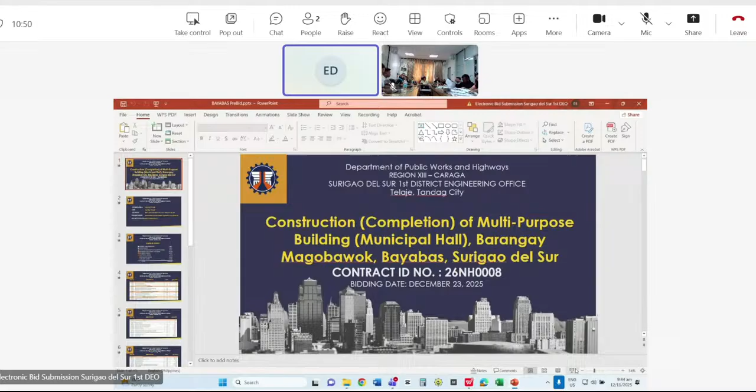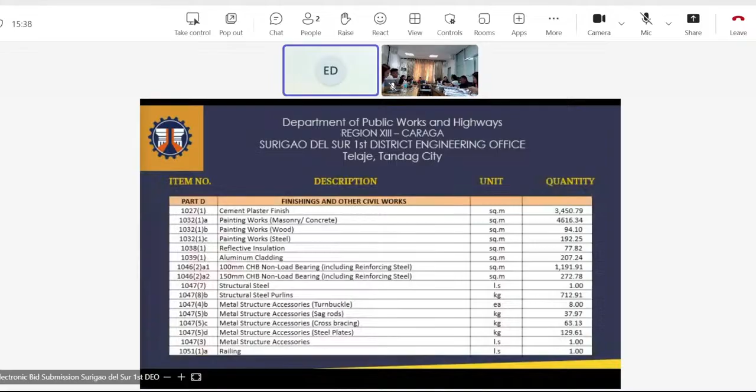Continuation for Part D, finishings and other civil works. The item number, description, unit, and quantity are being shown.

For Part E, plumbing works, and Part F, electrical works, the item number, description, unit, and quantity are being shown. And for Part G, mechanical works, Part H, auxiliary works, the item number, description, unit, and quantity are being shown.

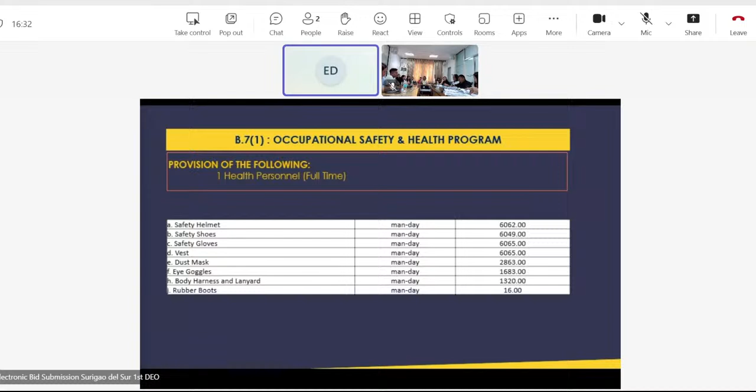For the project billboard, we have 1 unit 4x8 DPWH tarpaulin and 1 unit 8x8 POA tarpaulin. For the occupational safety and health program, we have 1 health personnel full-time, and the equipment description, unit, and quantity are being shown. The minimum equipment requirement: 1 plate compactor, 1 concrete vibrator, 1 bagger mixer, 1 dump truck, and 1 jackhammer.

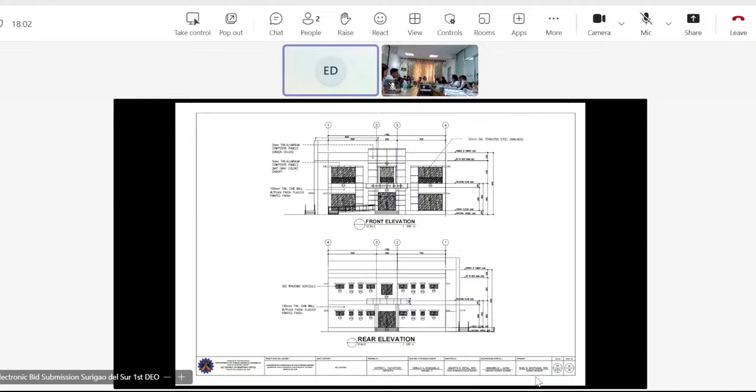For the architectural plans, we have the perspective, location plan, vicinity map, and location. The ground floor plan, second floor plan, and roof deck floor plan. The front elevation and rear elevation. The left side elevation and right side elevation. The cross section to AA and longitudinal section to BB. The schedule of doors and windows.

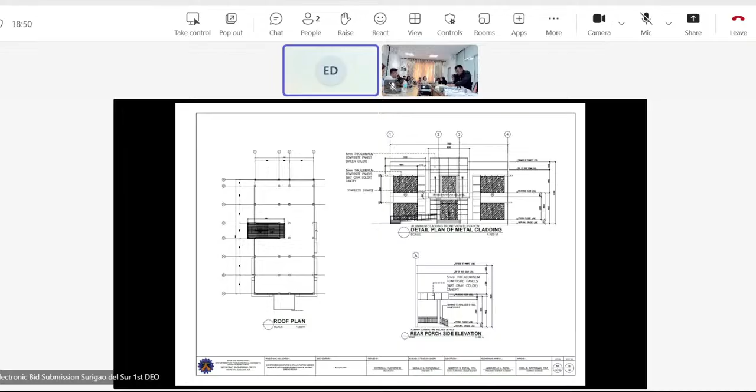A reflected ceiling plan for ground floor and second floor, and also the roof deck. The roof plan and detailed plan of metal cladding. Detailed plan of metal cladding. Full cladding details. The plan for the ramp.

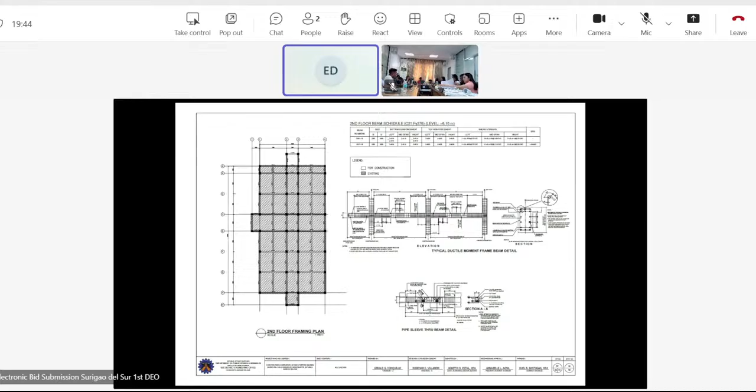And for the structural plans, we have the foundation plan, the footing schedule, the slab details, and tie beam details. The second floor framing plan and floor beam schedules. Stair details. Roof deck beam schedule and roof deck framing plan, roof deck slab plan, and steel deck specifications.

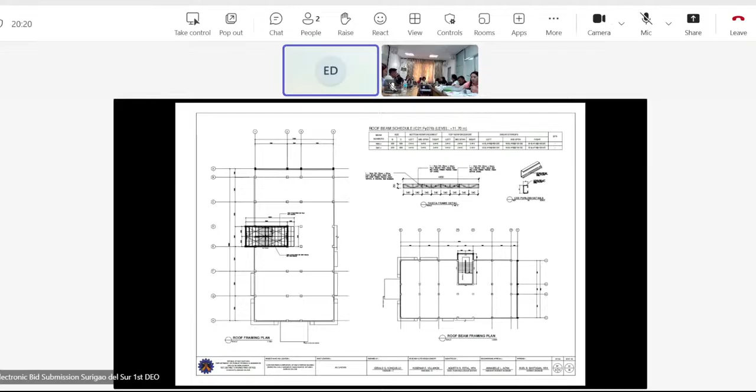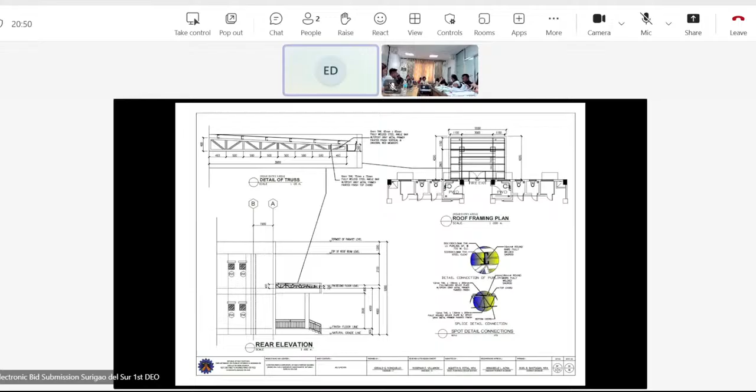The roof framing plan, and roof beam framing plan, and the fascia frame detail. Half truss detail, ridge girt detail, steel girt detail. The roof framing plan, detail of truss and rear elevation details for the truss. Detail of truss and roof framing plan. Stair railing details.

And for the plumbing plans, we have the water line layout plan for the ground floor, second floor, and roof deck. Storm drain line layout plan for ground floor, second floor, and roof deck. The sanitary line layout plan for ground floor and second floor.

The isometric diagram for water line layout plan. Isometric for storm drain line layout. Isometric for sanitary line layout. Septic tank details, catch basin details, clean out and service tap connection details. Details for elevated tank. Cistern tank details.

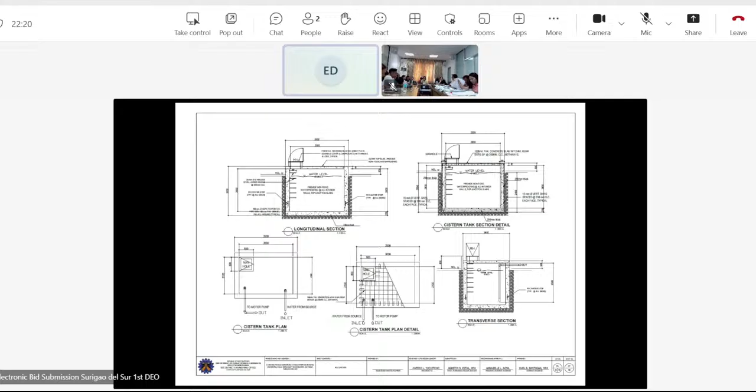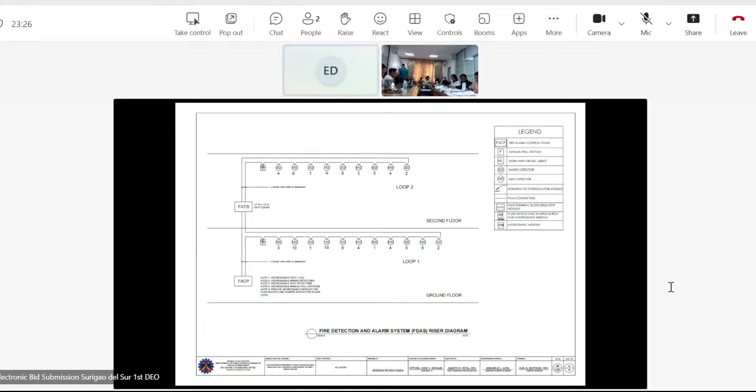Next, for the mechanical plans, we have the FDAS layout plan for ground floor and second floor. The FDAS riser diagrams. And for the dry standpipe for fire sprinkler system layout plan for ground floor and second floor. The isometric diagram for fire sprinkler system layout plan. Detail of fire department connection.

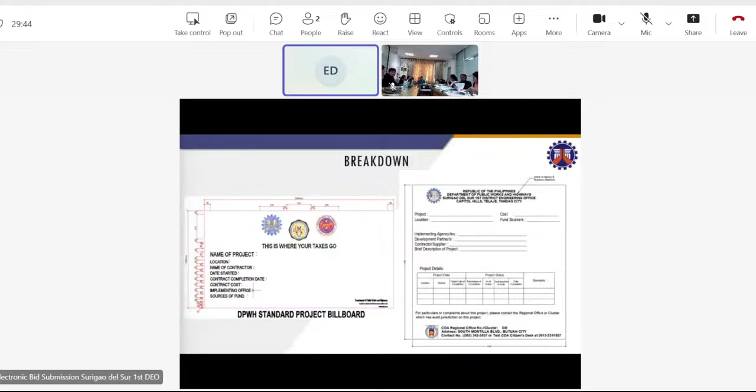Breakdown for project billboard. Breakdown for B.7, occupational safety and health: we have 1 safety practitioner and 1 health personnel. For B.8, traffic management, the materials, unit, and quantity are as shown.

For Part C earthworks, the item number, description, unit, and quantity are as shown.

Part D, sub-base and base course, we have item 200, and Part E surface course, we have item 311. For Civil Works 2, construction of drainage structure along road, Part F drainage and slope protection structure, the item number, unit, description, and quantity are as shown.

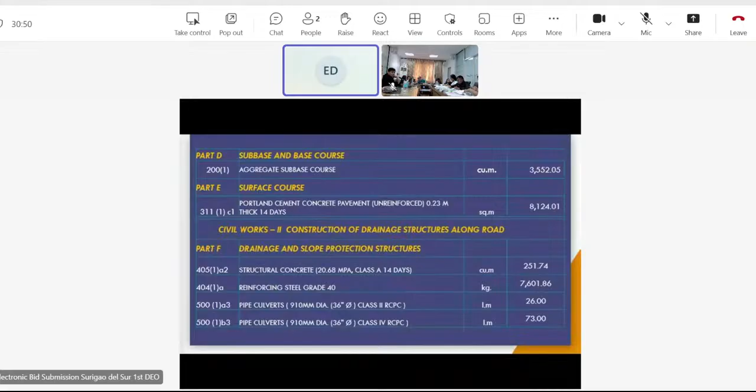For minimum equipment requirement, we have 4 units dump truck, 1 unit water truck, 1 unit transit mixer, 1 unit backhoe, 1 unit motorized road grader, 1 unit vibratory roller, and 1 joint sealer equipment machine.

For sand and gravel at Caras-an River Quarry, average hauling distance 91.02 kilometers from project site. For item 200 and boulders at San Isidro River Quarry, average hauling distance 8.93 kilometers from project site.

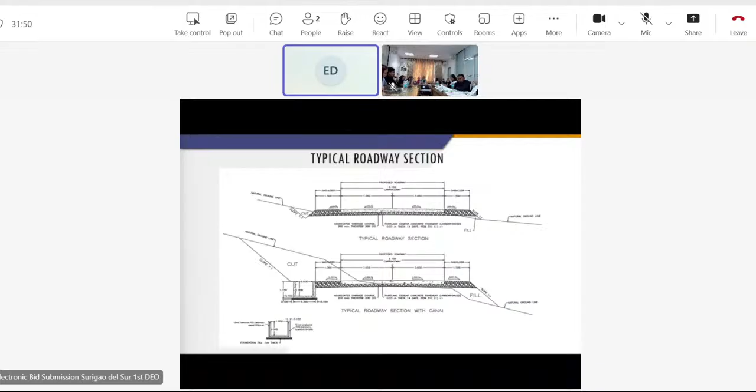That's all, thank you. Okay, thank you Engineer. Any comment from our procurement?

From our pre-pro, we have add 1 unit billboard for installation in the middle part of the project. Removal of trees, item number correction must be 1011. Verify the reason of removal of RCPC. Reflect on plan the existing RCPC in dotted or broken line to validate the removal and replacement. Then verify survey team if existing RCPC can still be reused and reinstalled. Indicate on plan the number of defective RCPC, possibly not all. That's it.

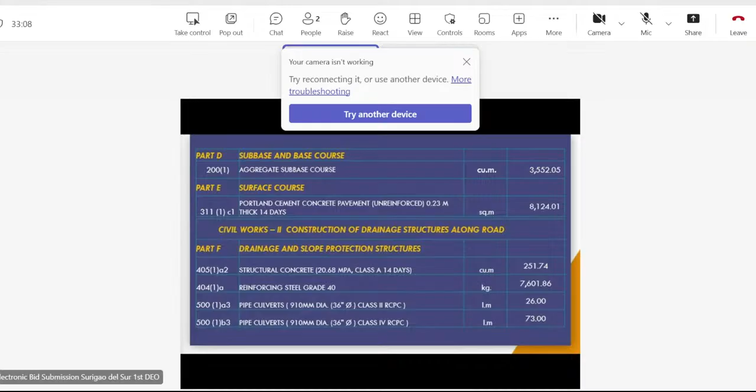Okay, any comment from the DPWH? Billboard. So, since there is none, we'll proceed to the next project, which will be represented by Engineer Sahay.

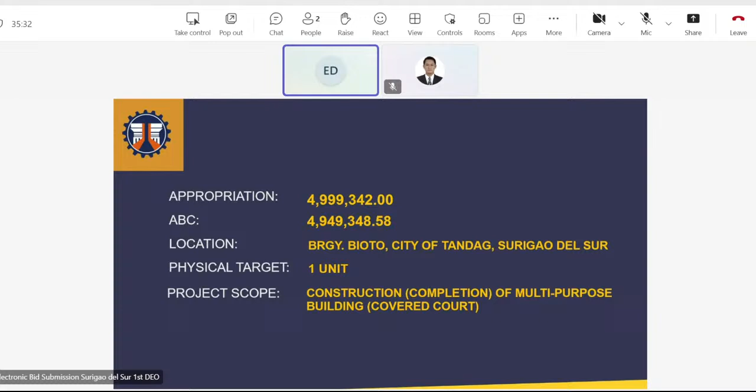Location at Barangay Bioto, City of Tandag, Surigao del Sur. Physical target of 1 unit. Then project scope, construction completion of multi-purpose building covered court, for project duration of 123 calendar days.

Scope of work: general requirements 3.11%, earthworks 1.95%, plain and reinforced concrete work 18.04%, finishing and other civil works 63.21%, electrical works 3.18%, plumbing works 4.91%, and mechanical works 5.60%, with a total of 100%.

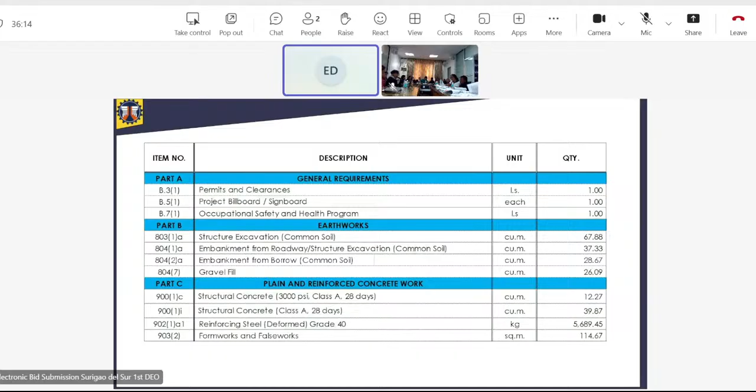For the item number, description, unit, and quantity are shown. Part D, finishing and other civil works, quantity, unit, description are shown. Part B, continuation of Part D. Then Part E, electrical works, Part F, plumbing works, and Part G, mechanical works, item number, description, unit, and quantity are shown.

For minimum equipment requirement, we have the dump truck with a capacity of 12 cubic meters. B.51 project billboard: 1 unit of 4x8 DPWH tarpaulin and 1 unit of 8x8 COA tarpaulin. And for B.71, occupational safety and health program, provision of the following: 1 health personnel and 1 safety practitioner. The names and specification, unit, and quantity are shown.

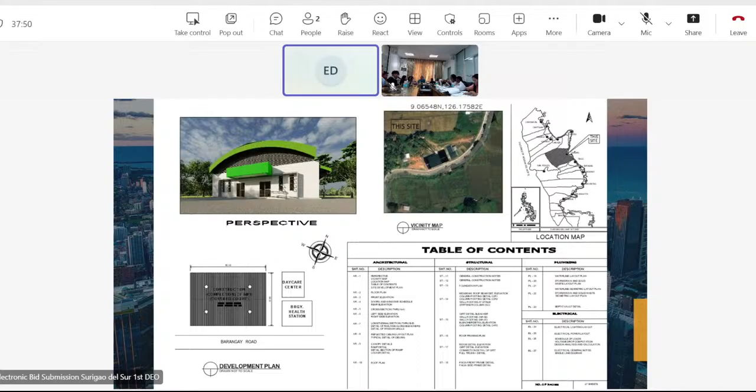Plans: architectural plan, the perspective, vicinity map, development, and location of the floor plan, front elevation, doors and window schedule, and rear elevation, cross section through AA, and left side elevation, and right side elevation, longitudinal section through BB, detail of railings along bleacher, and detail of window grills.

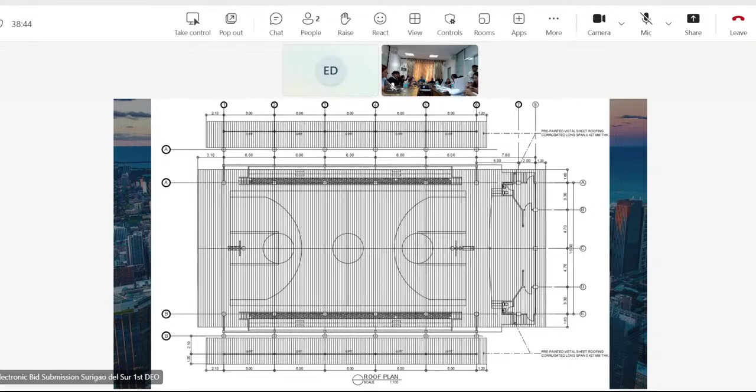Reflected ceiling layout plan, and typical detail of ceiling, canopy detail, louver detail, ramp detail, and detail section of ramp, roof plan, and for structural plan, structural foundation plan, column detail C2F1, column footing detail C3F2, and wall footing detail at stage, mid beam roof beam detail elevation, and...

Stiffener column, wall footing detail WF2, and wall footing detail WF1, girt detail at bleacher, column footing detail C4F2, bleacher detail section, and roof framing plan, ridge detail elevation, girt detail elevation, full truss one detail, and connection detail of girt, fascia front frame detail, fascia side frame detail.

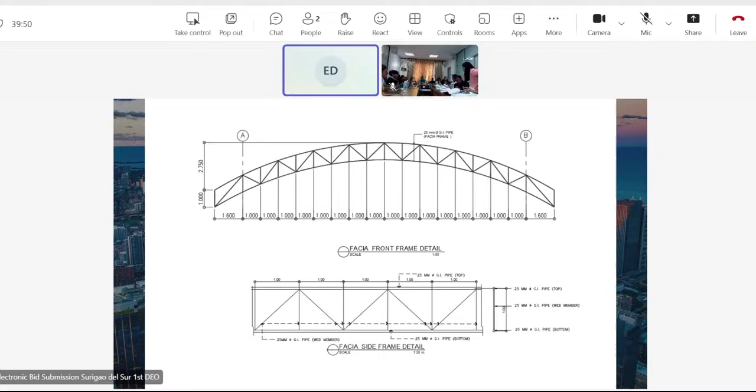For plumbing plan, you have the water line layout plan, storm drain and solid waste layout plan, water line isometric layout plan, storm drain and solid waste isometric layout plan, and septic vault detail section through AA and detail section through BB. Electrical plan: electrical lighting layout plan, and electrical power layout plan.

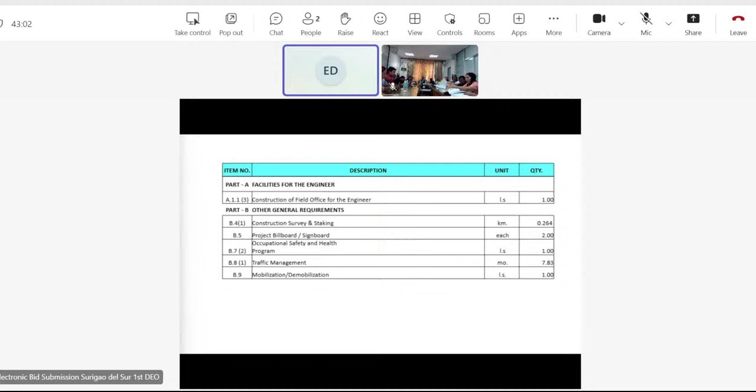For Part A, facilities for the engineer, Part B, other general requirements, the item number, description, unit, and quantity are being shown. For Part C, earthworks, and Part D, subbase and base course, the item number, description, unit, and quantity are being shown.

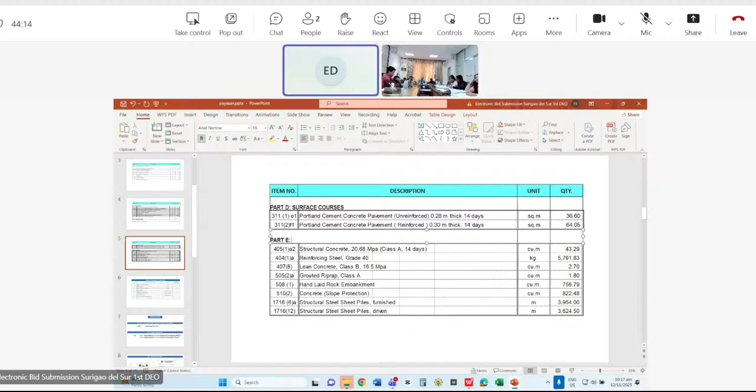So for Part E, surface courses, and Part F, drainage and slope protection works, the item number, description, unit, and quantity are being shown.

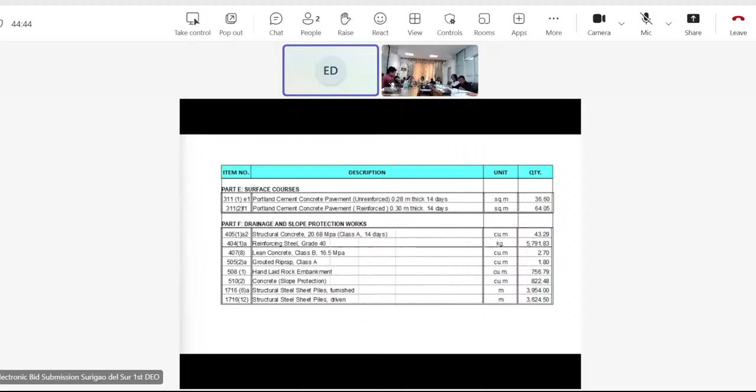For the minimum equipment requirement, we have dump truck 1, vibro hammer 1, water truck 1, transit mixer 1, backhoe 1, motorized road grader 1, vibratory roller 1, and joint sealer machine or equipment 1, a total of 8 equipments.

For the breakdown, construction of field office for the engineer, we have 1 unit bunkhouse 7x7. Then project billboard, we have 2 each composed of 1 unit for DPWH and 1 unit for COA. Here is the project billboard.

For the occupational safety and health program, we have 1 first aider and 1 safety practitioner, both full-time. Then the materials for the safety and health program, the unit and quantity are as shown.

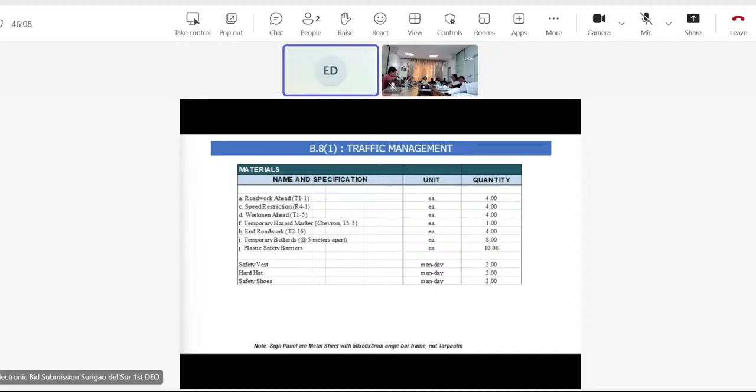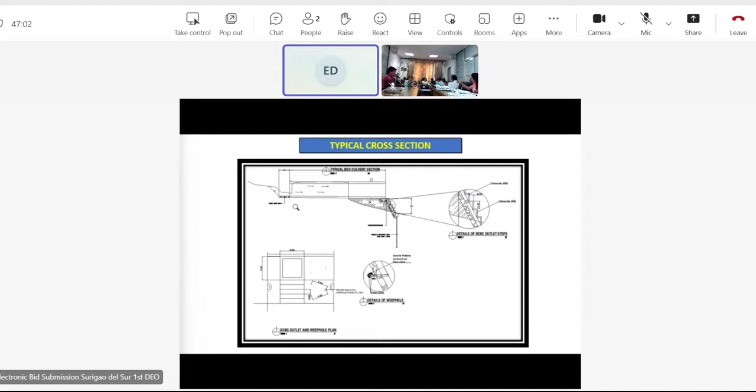We also have the typical cross section for the box culvert and outlet RCBC outlet steps details.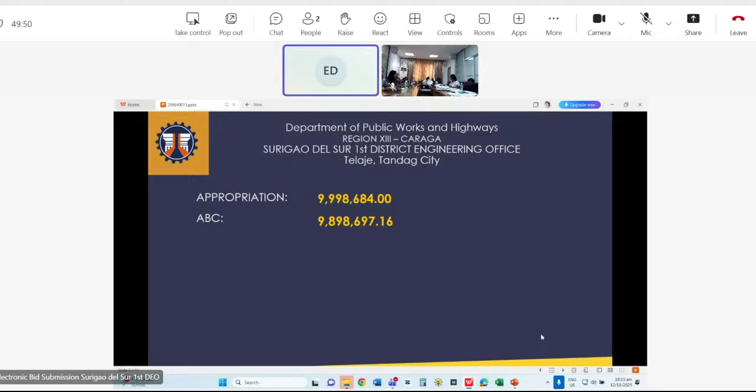Appropriation 9,998,684 pesos. ABC, we have 9,898,697.16 pesos. Location, Barangay Cabugo, Bayabas, Surigao del Sur.

Number of buildings, 1 unit. Project scope, completion of multipurpose building covered court. Project duration, 193 calendar days.

For scope of work, first, general requirements, we have 1.18%, earthworks 3.60%, plain and reinforced concrete work 21.86%, finishings and other civil works 65.07%, plumbing works 2.84%, electrical works 3.48%, and mechanical works 1.97%, with a total of 100%.

Item number, description, units, and quantities for Part A, Part B, and Part C are shown.

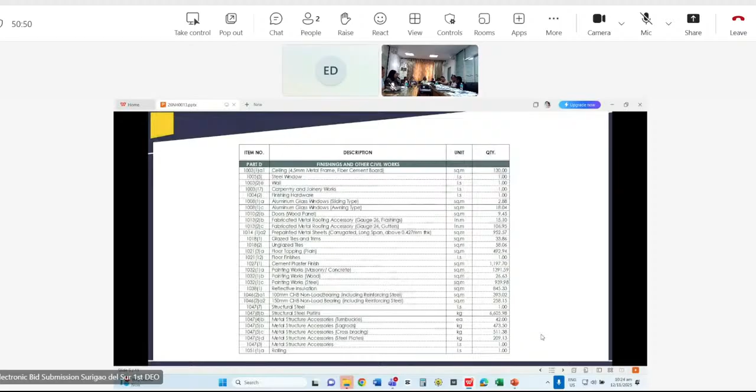Item number, description, units, and quantities for Part D are shown.

Item number, description, units, and quantities for Part E, Part F, and Part G are shown.

For the minimum equipment requirements, we have 1 plate compactor, 1 concrete vibrator, 1 bagger mixer, 1 dump truck, and 1 jackhammer.

For the permits and clearances, we have BFP, zoning, master plumber, and PEE.

For the project billboard, we have 1 unit 4x8 DPWH tarpaulin backed with marine plywood and 1 unit 8x8 COA tarpaulin backed with marine plywood.

Next, for the occupational safety and health program, provision of the following: 1 health personnel and 1 safety practitioner. For the materials, we have the name and specification, units, and quantities are shown.

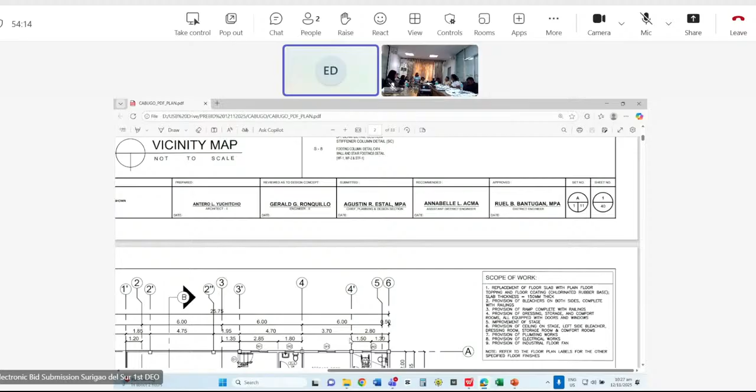Number 7, provision of plumbing works. Number 8, provision of electrical works. Number 9, provision of industrial floor fan. Note, refer to the floor plan labels for the other specified floor finishes.

Next, the ramp detail and isometric ceiling detail and reflected ceiling plan.

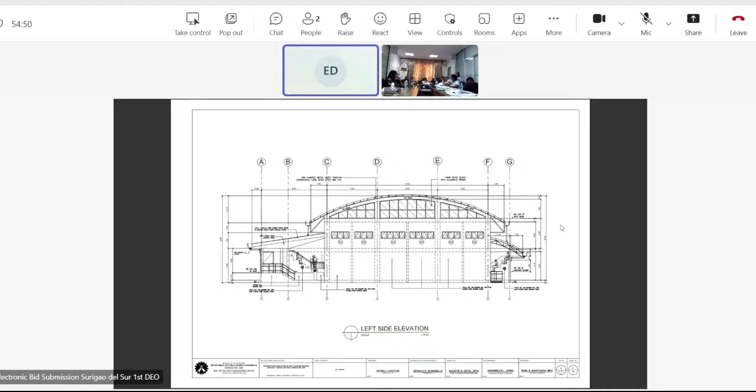Front elevation, the right side elevation, the left side elevation, the rear elevation.

We have the schedule of doors and windows and 10 mm thick glass wall detail.

Longitudinal section AA. Longitudinal section CC. Cross section BB.

Roof plan. Scope of work, replacement of corrugated roof and provision of the following corrugated roof on bleachers, stage, and additional span. Pre-painted GI gutter and GI flashing.

Next, the tie beam plan. Next, the roof beam plan.

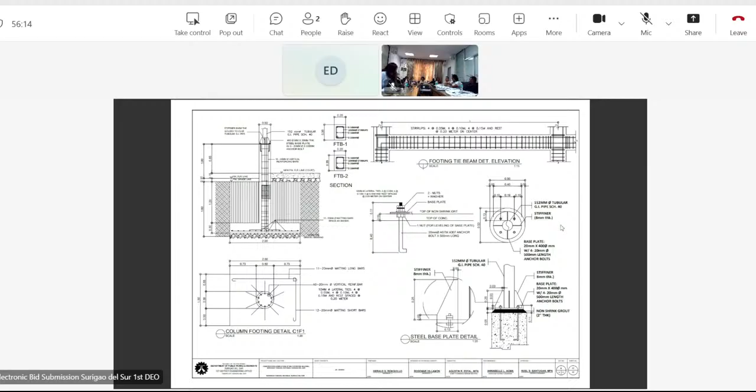Next, we have the column footing detail, steel base plate detail, and footing tie beam detail elevation. Also the roof beam and mid beam detail, the stiffener column detail, and the column footing details.

Next, we have the footing column detail for C4 and F4, wall and stair footing details.

Next, we have the arc beam detail elevation, ramp detail elevation, bench elevation detail, typical detail of stairs, and stair railing detail.

Next, we have the left side bleacher detail section, the right side bleacher detail section, connection detail of girth, and detail of railings along bleachers.

Next, we have the roof framing plan. Scope of work: replacement of the following - C purlins with angular cleats, cross bracing with turnbuckles, sag rod, ridge, and girths.

Provision of the following: trusses, C purlins with angular cleats, cross bracing, sag rod, fascia frame with fascia cover, ridge and girth at bleachers and stage.

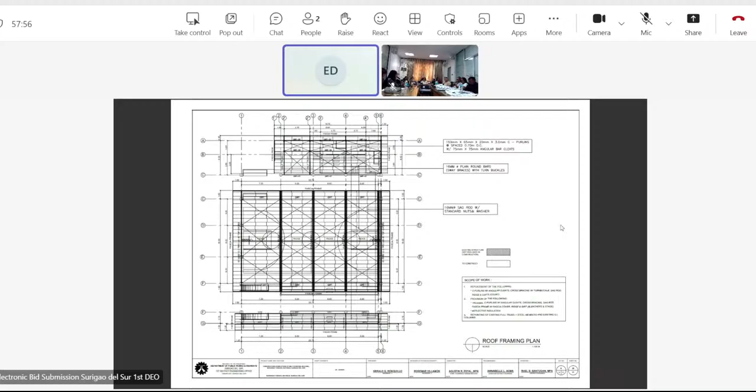Next, we have the full truss detail, girth detail, ridge detail, fascia front and rear frame detail, fascia side frame detail, and window grills detail.

Next, we have the half truss one detail, fascia frame detail for bleachers.

Next, we have the half truss detail 3 and 2, gusset plate detail.

Next, we have truss to beam connection detail, fascia frame detail, girth details for left side bleacher.

Next, for the plumbing, we have the sanitary layout plan, storm drainage layout plan, water line layout plan. Next, we have the septic vault detail and catch basin detail.

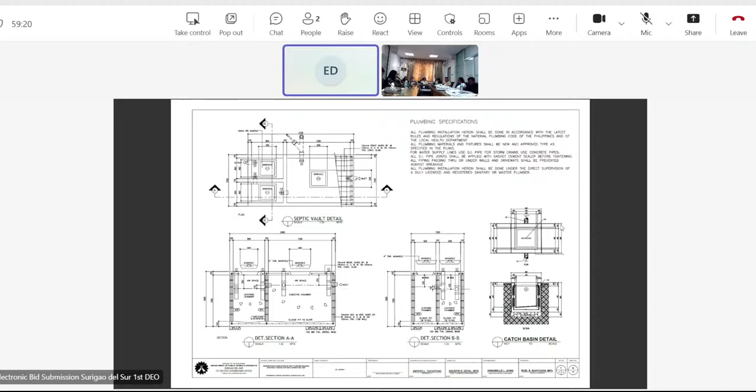For the electrical, we have the electrical lighting layout plan, electrical power layout plan. That would be all. Thank you.

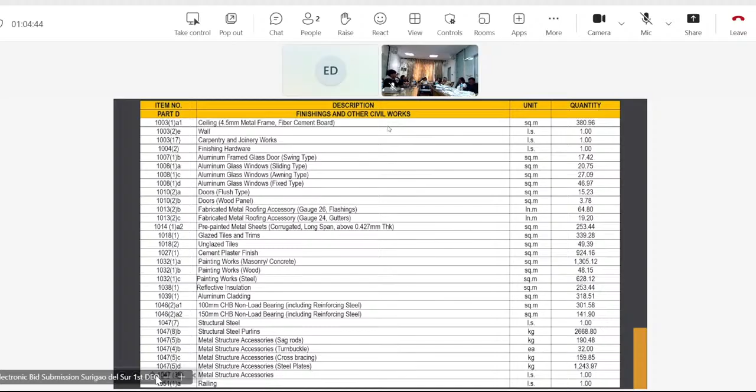The number, description, unit and quantity for Part E, plumbing works; Part F, electrical works; Part G, mechanical works; and Part H, auxiliary works are shown.

For minimum equipment requirement, number, equipment description, capacity, and number of equipment are shown.

For the plan: perspective, vicinity map, site development, and location map.

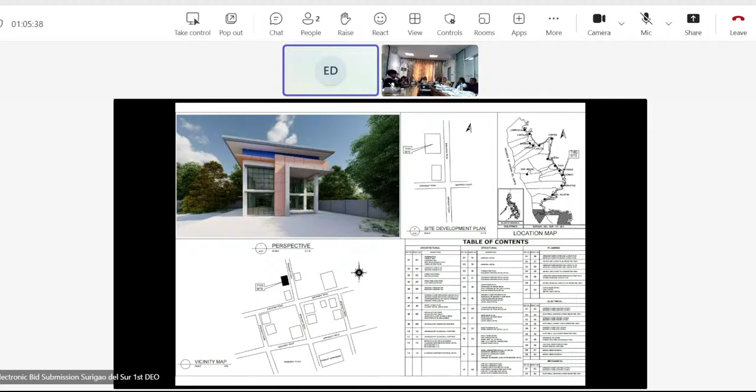Ground floor plan and second floor plan, front elevation and rear elevation, right side elevation and left side elevation.

Section through BB and section through AA. Ground floor reflected ceiling plan, second floor reflected ceiling plan, and ceiling typical detail.

Roof layout plan and canopy detail above the ramp, schedules of doors and windows, and schedule of partition glass.

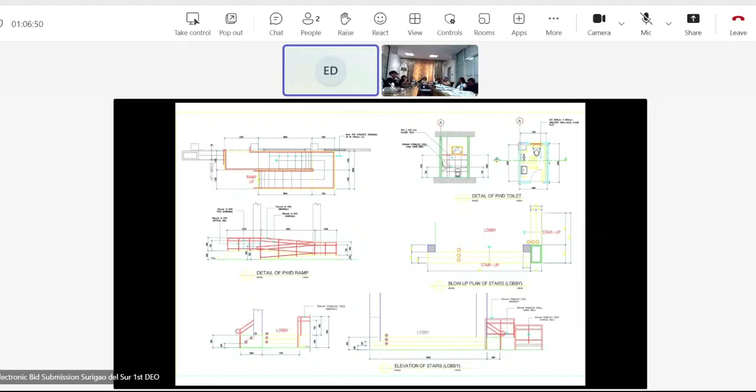Detail of PWD ramp, detail of PWD toilet, blow-up plan of stairs at lobby, and elevation of stairs at lobby.

Aluminum composite material detail, foundation plan, column and footing detail F1C1, concrete pedestal detail C2F2 and concrete pedestal detail C3F3.

Grade beam plan, wall footing detail F1 or WF1, wall footing detail WF2, and CHB on TB1 detail, and schedule of footing tie beam FTB.

Schedule of second floor beams, second floor framing plan, stiffener column detail, and typical section of beam.

Schedule of concrete slabs and typical section of slab, section through AA and section through BB.

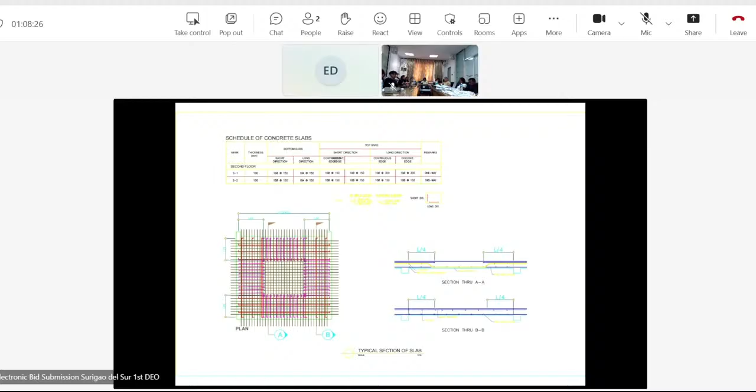Roof beam plan, LB01 beam detail section, schedule of roof beam, and ledge detail.

Roof framing plan, steel base plate detail 1, steel base plate detail 3, and steel base plate detail 2.

Half truss detail, CEE purlins detail, steel girt 1, 2, 3 details, girt 01 detail connection, girt 2 detail connection, girt 3 detail connection, and fascia frame detail.

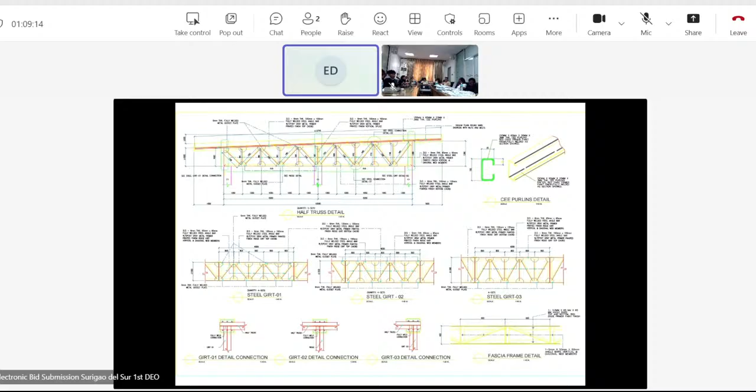Steel connection detail 2, steel connection detail 1, spot detail, stair plan second floor, stair plan at ground floor, and ground floor to second level stair connection detail.

Fire exit stair ground floor, fire exit stair second floor, foundation plan of fire exit stair, main steel framing fire exit stair, fire exit stair section detail, and base plate connection detail.

Ground floor waterline layout plan and second floor waterline layout plan, and waterline layout plan isometric view.

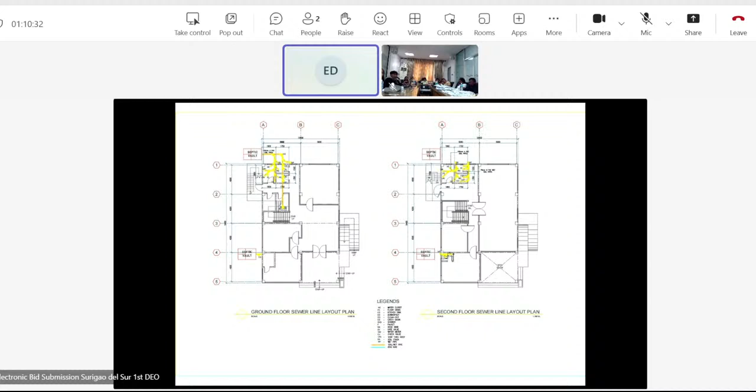Ground floor sewer line layout plan, second floor sewer line layout plan, and sewer line layout plan isometric view.

Ground floor storm drainage layout plan, storm drainage layout plan, and storm drainage layout plan isometric view.

Septic vault 01 detail, joint detail, and septic vault 2 detail.

Ground floor lighting layout plan, second floor lighting layout plan, and electrical lighting layout plan isometric view.

Ground floor power layout plan and second floor power layout plan, and electrical power layout plan isometric view.

Ground floor ACU layout plan, second floor ACU layout plan, and electrical power layout plan isometric view.

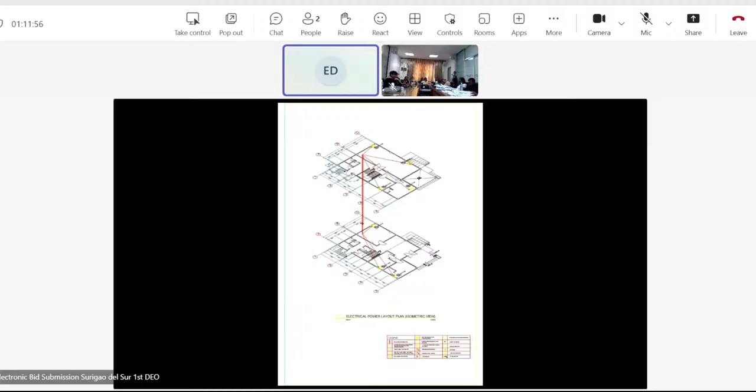Schedule of loads and design analysis and calculation, voltage drop computation and short circuit analysis, and single line diagram.

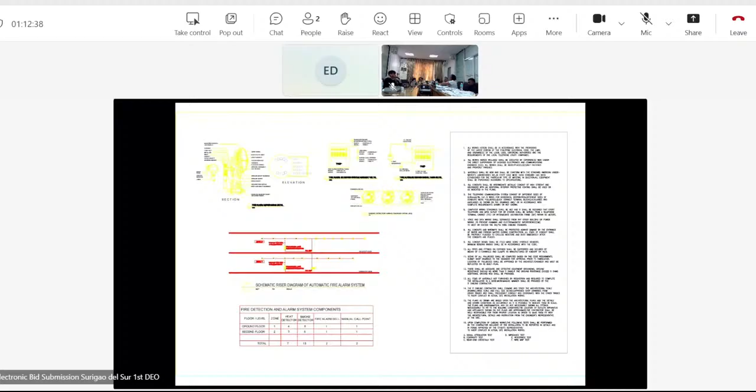Next is ground floor fire alarm layout and second floor fire alarm layout, and schematic riser diagram of automatic fire alarm system.

That's all. Thank you.

Okay, thank you. So from our pre-pro review, we have railings used in the program of works that must be the same with the plan. Edit the plan. That's all.

The next project, 26I0015, construction of circumferential road, 0 plus 00 to 1 plus 118.5, Barangay Bolhoon, San Miguel, Surigao del Sur. ABC, 19,233,645 pesos and 52 centavos.

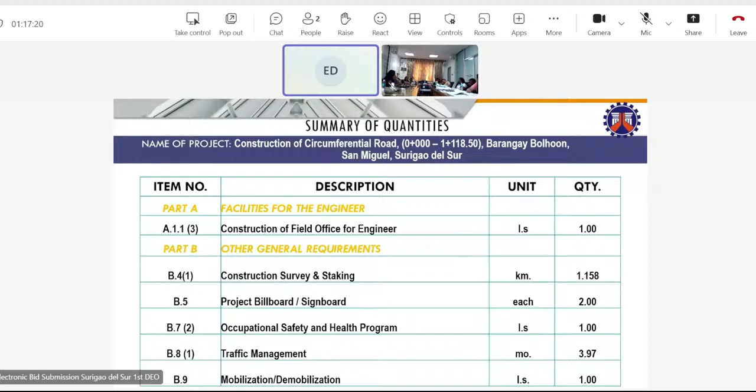So this slide presents the other general requirements included in the project as provided in the bidding documents.

So for B.5, project billboard or signboard, under other general requirements, the contractor is required to provide project signage, specifically 1 unit 4x8 tarpaulin for DPWH and 1 unit 8x8 tarpaulin for COA.

So for item B.7 covers the occupational safety and health program, requiring compliance with the DOLE and the DPWH safety standards. And also B.8, the traffic management, which includes traffic control measures, signages, and personnel to ensure public safety during construction.

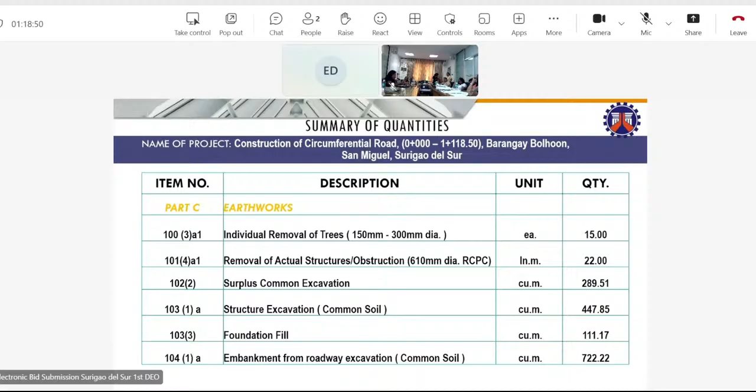So next is a continuation of the summary of quantities, highlighting additional work items included in the project scope. Next also is the summary of quantities and their descriptions.

For the materials, sand and gravel may be sourced from the Carac-an River Quarry with an average hauling distance of 98.95 kilometers from the project site. And for Item 200, materials may be sourced from Bolhoon River Quarry with an average hauling distance of only 0.54 kilometers from the project site.

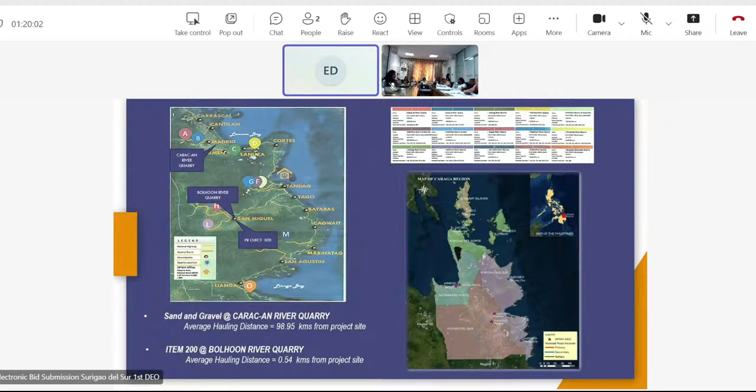Next, showing the typical section with RCPC details. Next is the typical section without shoulder and the typical section with shoulder. Also the typical roadway section with canal on the right side and its details.

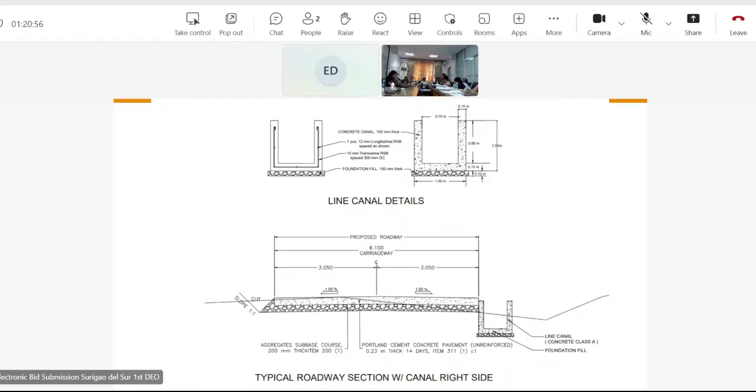So next is the plan and profile of Road 3, from station 0 plus 00 to station 215.

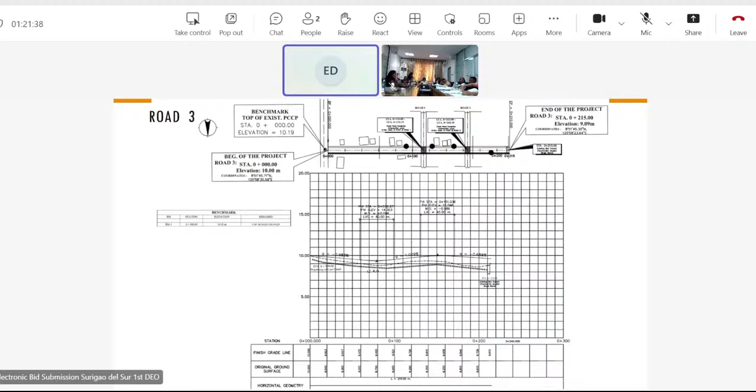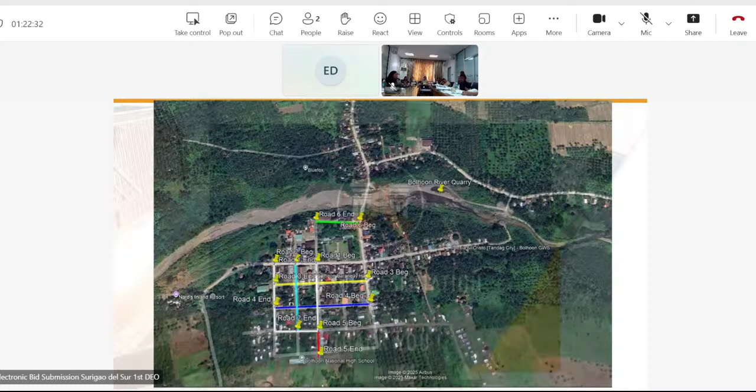Showing you is the vicinity map of the project site. That concludes my presentation. Thank you.

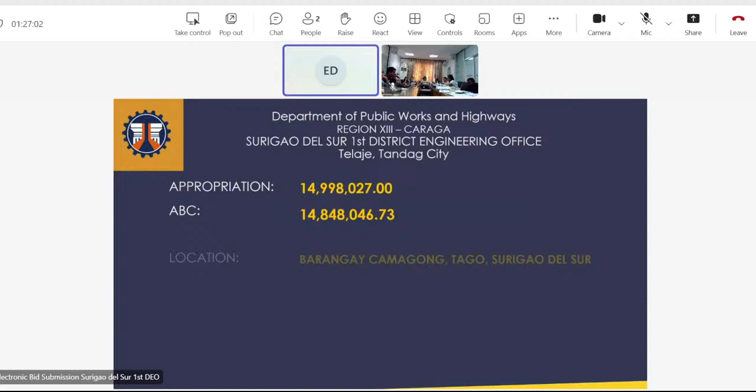Appropriation 14,998,027 pesos. ABC of 14,848,046.73. Location, Barangay Camagong, Tago, Surigao del Sur. Physical target, one number of building.

Project scope, construction of covered court with bleachers and stage. Project duration is 253 calendar days.

Scope of works: general requirements 1.41%, earthworks 8.72%, plain and reinforced concrete works 23.20%, finishings and other civil works 61.36%, plumbing works 2.78%, electrical works 2.53%, with a total of 100%.

For Part A, general requirements, and for Part B, earthworks, the item number, description, unit, and quantity are being shown. For Part C, plain and reinforced concrete works, item number, description, unit, and quantity are being shown.

For Part D, finishings and other civil works, item number, description, unit, and quantity are being shown, with a continuation for Part D, finishings and other civil works.

For Part D, finishings and other civil works, continuation. Part E, plumbing works. Part F, electrical works. The item number, description, unit, and quantity are being shown.

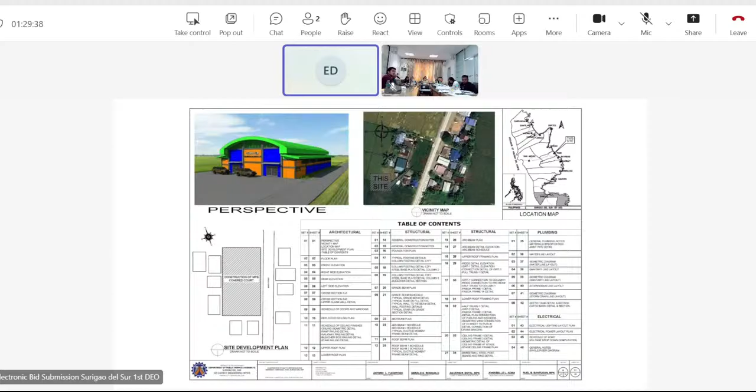For architectural plans, the perspective, vicinity map, location map, and site development plan are shown. Floor plan, front elevation, right side elevation, rear elevation, left side elevation, cross section AA, cross section BB.

Schedule of doors and windows. Upper roof plan. Lower roof plan for the featured CRs.

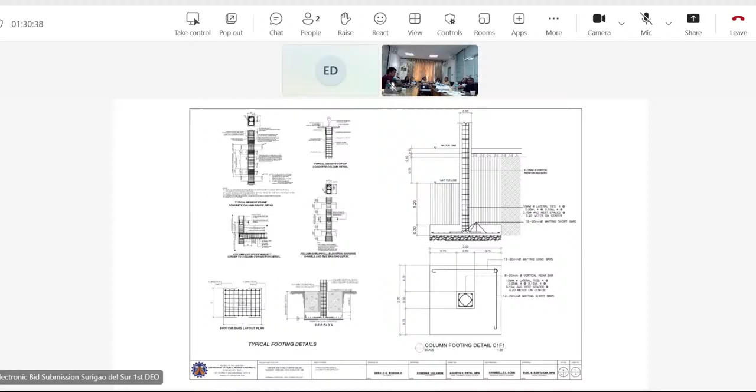Structural plans: foundation plan, typical footing details, and column footing details C1 F1. Column footing details C2 F1 and steel base plate details for column 2. Steel base plate detail for column 3, column footing detail C3 F2, and bleacher detail section.

Grade beam plan. Grade beam schedule. Typical grade beam details. Typical wall to tie beam details and wall footing details are shown.

Mid beam plan, mid beam schedule, and typical ductile moment frame beam detail. Roof beam plan. Roof beam schedules. Arc beam plan, arc beam detail elevation, and arc beam schedule.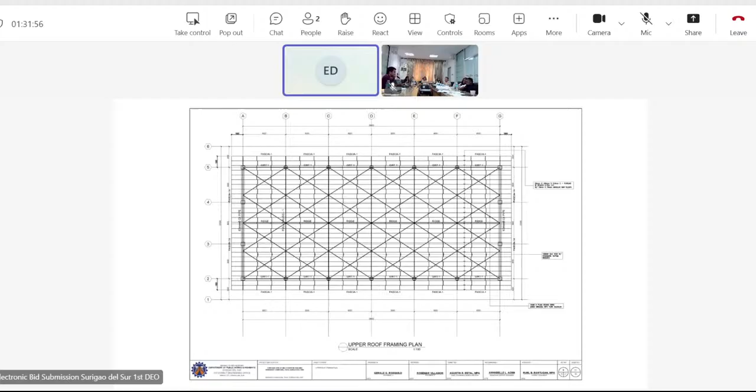Upper roof framing plan. Ridge detail elevation, girt detail elevation, connection detail of girt 1, and full truss 1 detail. Girt connection to C1, ridge connection to arc beam, half truss to C1, fascia frame 1 detail, and fascia frame 1A detail.

Lower roof framing plan. Half truss 1 detail, girt 2 detail, fascia frame 2 detail, detail plan connection of purlin sag rod and cross bracings. Basketball steel post board and ring detail.

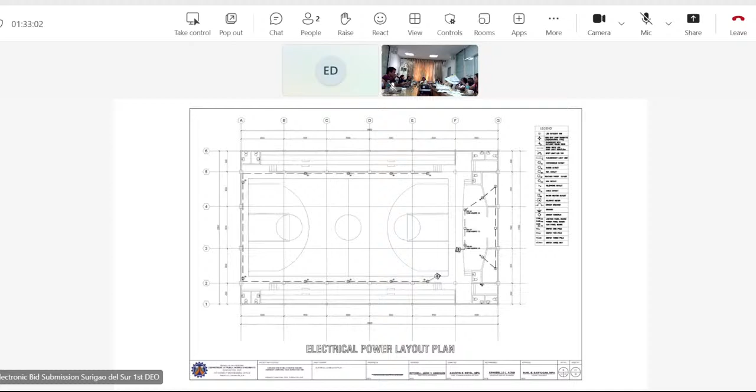Plumbing plans: water line layout plan, sanitary line layout. Electrical plans: electrical lighting layout plan, electrical power layout plan.

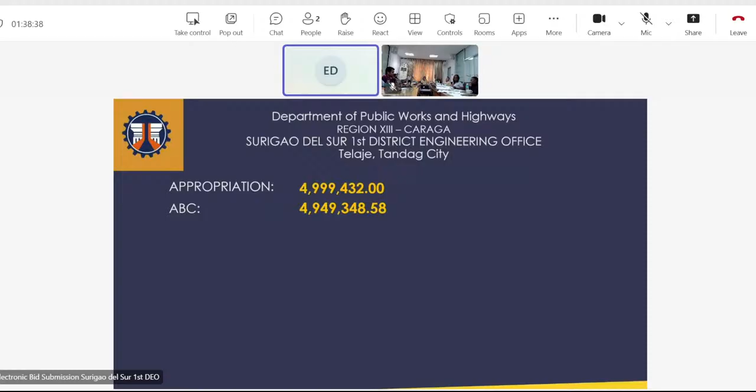Appropriation, 4,999,432. ABC of 4,949,348.58. Location, Barangay Pong-on, San Agustin, Surigao del Sur.

Physical target, one number of building. Project scope: additional one span, provision of stage, provision of bleacher at one side, electrical works, plumbing works, and repainting of existing structure. Project duration, 118 calendar days.

Scope of works: general requirements 1.93%, earthworks 12.76%, plain and reinforced concrete works 30.04%, finishings and other civil works 48.08%, plumbing works 2.30%, electrical works 4.89%, with a total of 100%.

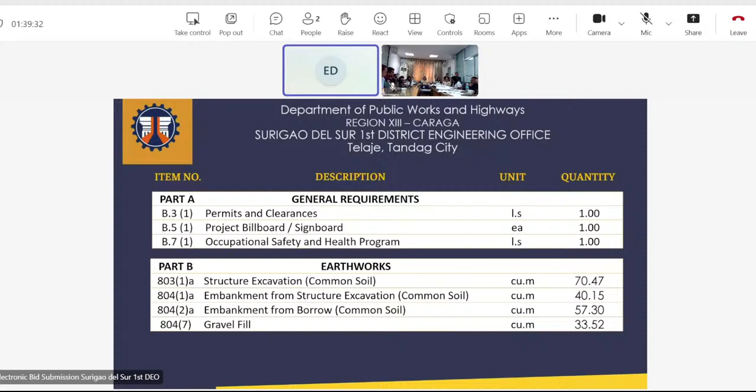Part A, general requirements. Part B, earthworks. Item number, description, unit, and quantity are being shown.

For part C, plain and reinforced concrete works, item number, description, unit, and quantity are shown. For part D, finishings and other civil works, the item number, description, unit, quantity being shown.

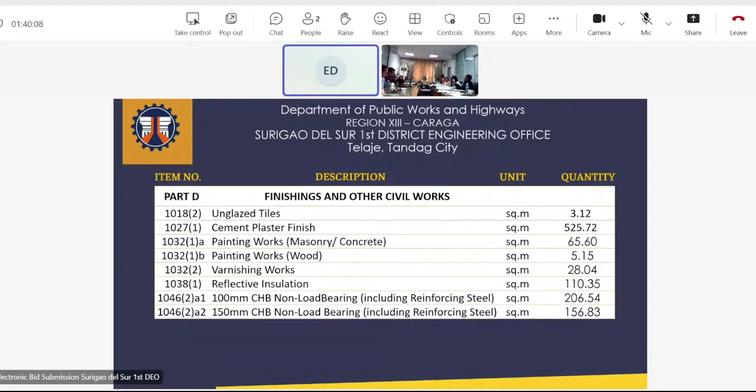Continuation of part D, finishing and other civil works, item number, description, unit, quantity being shown. Part E, plumbing works, part F, electrical works, item number, description, unit, quantity being shown.

For project billboard: 1 unit 4x8 DPWH tarpaulin and 1 unit 8x8 COA tarpaulin, both wrapped with marine plywood. Occupational safety and health program: provision of 1 safety officer part-time and 1 health personnel full-time.

Name and specification, unit and quantity are being shown. Minimum equipment requirement: plate compactor 1, concrete vibrator 1, one bagger mixer 1, dump truck 1, jackhammer 1, total of 5 number of equipment.

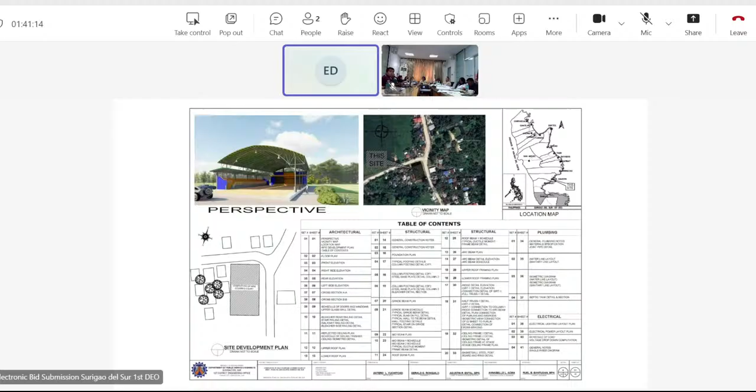Architectural plan: perspective, vicinity map, and site development plan. Floor plan, front elevation, right side elevation, rear elevation, left side elevation.

Cross-section AA, cross-section BB, schedule of doors and windows and upper glass wall detail. Upper roof plan, lower roof plan.

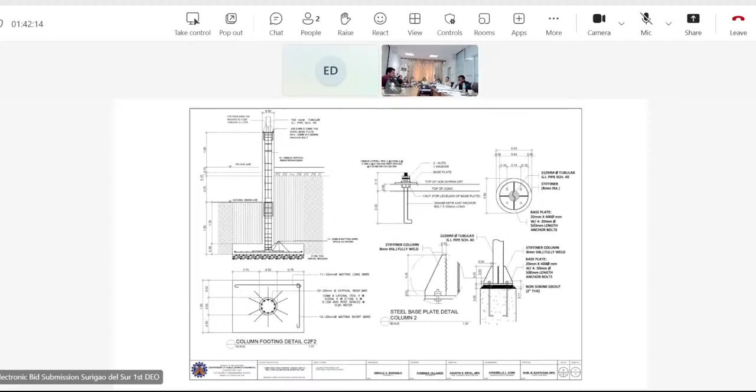Grade beam plan. Grade beam schedule and typical grade beam detail, typical wall to tie beam details, wall footing details, typical slab on fill details, and section stair, typical stair on grade section detail.

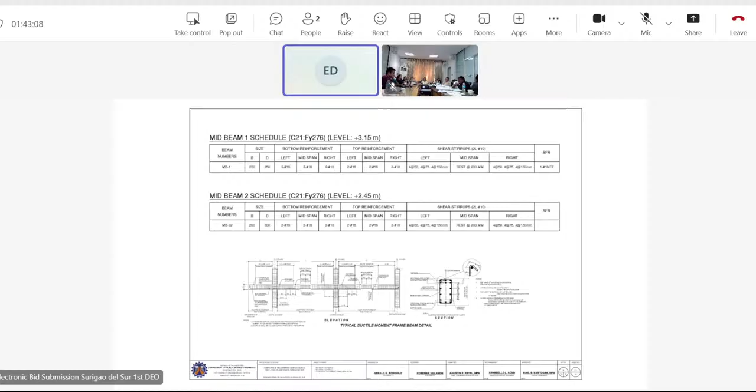Mid beam plan, mid beam schedules, and typical ductile moment frame beam detail. Roof beam plan, roof beam schedule, and typical ductile moment frame detail. Arc beam plan, arc beam detail elevation, and arc beam schedule.

Upper roof framing plan, lower roof framing plan, ridge detail elevation, girt 1 detail elevation, connection detail of girt 1, and full truss 1 detail. Half truss 1 detail, girt 2 detail, picture, ridge connection to arc beam, girt connection to C1, and detail connection

Detail connection of purlins and sagrod. Also the cross bracings. Basketball steel post, board and ring detail.

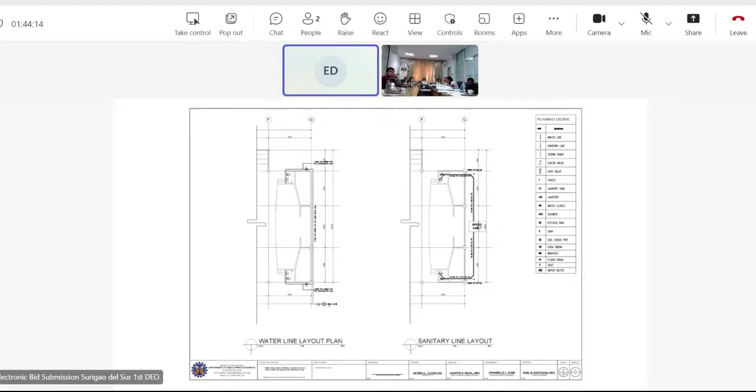Plumbing plans: water line layout plan, and sanitary line layout. Septic tank detail, detail section. Electrical plans: electrical lighting layout plan, and electrical power layout plan.